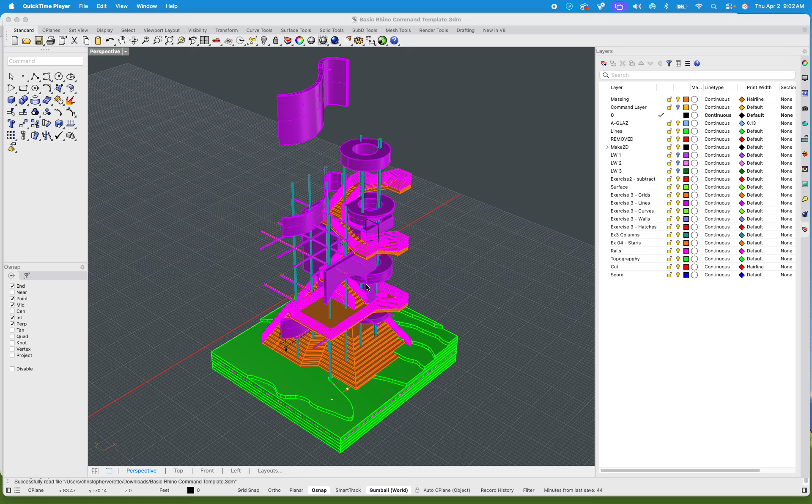But just a continuation from last time, we talked about in exercise 5 part 2 that essentially we're making a digital puzzle in many cases, basically separating each of these parts.

So I wanted to start going over one of the greatest tools that Rhino has, which is the ability to unroll surfaces. But I also wanted to go over some key concepts, because it's pretty obvious that some of these columns, beams, and structural elements are obviously not going to be laser cut. Those would be purchased at scale. You would find dowels that are 1/8, that are 1/16. Of course, 1/16 by 1/16 would be a 6 by 6 inch column at 1/8 scale. Hopefully that's making sense - relatively speaking, some things you can't just purchase.

You can't just purchase this wonderful cylindrical piece with a hole in it, so of course we're going to have to make those things. However, at the same time, we also want to start getting rid of things that we know we aren't going to make. After all, we do have a copy, so we could potentially use that for rendering or creating perspectives eventually.

So this is essentially my puzzle piece model, with its own copy, if you will. However, I mentioned last time, before we start laser cutting the topography, you might want to make accommodations for what you have going on in your piece. For instance, I have a bunch of these extrusions, and I may want to lift that up a bit more and get that just right, letting some of the stairs blend in and letting some of them go down.

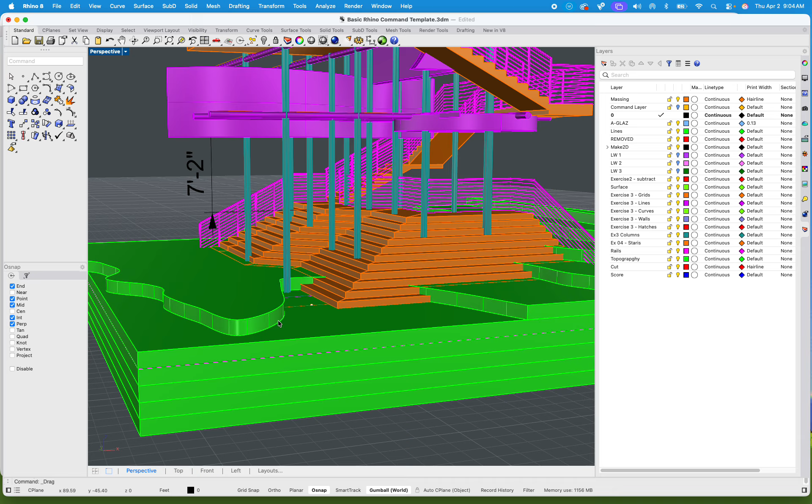After all, essentially at 1/8 scale, a 1/8 piece equals a foot. Most cardboard comes at 1/8 inch, and that already has a scale attuned to it. So in our case, we do have to do a little bit of extra critical thought. I've brought in at least 3 of the arguably better models.

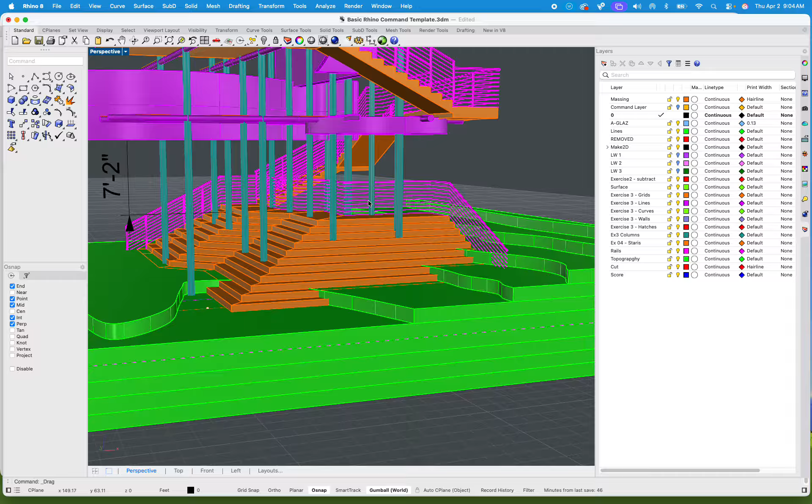Some of them have stairs - I want you to look at the quality and the way that they actually made these stairs, because you don't necessarily have to make it exactly like the digital model. We can prepare for that in the digital model as well.

So a couple of things. First things first, I think I'll turn off my rails, or essentially get rid of them. I do have a copy of them, so I don't necessarily need them.

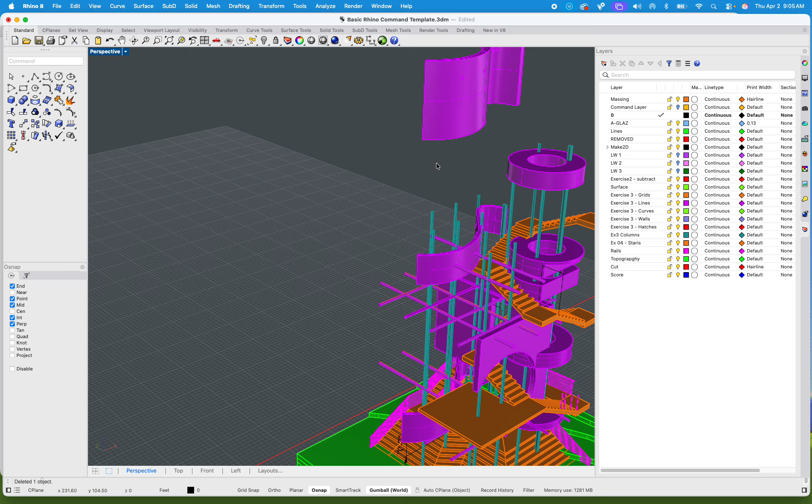So again, I still have some refinement to do. As you guys noticed from last time, we were still starting to take these pieces apart, refine them, cut them, blend them together, and for some of us, maybe even exploding them. For instance, my stair is all one piece - I may actually want to explode that, break it down, and start to understand it bit by bit.

However, one of the most important things I'd like to go over today is definitely the topography and getting that really ready. To make it easier on myself, I'd probably want to cut out my topography, glue that together, but then actually start placing my vertical columns in.

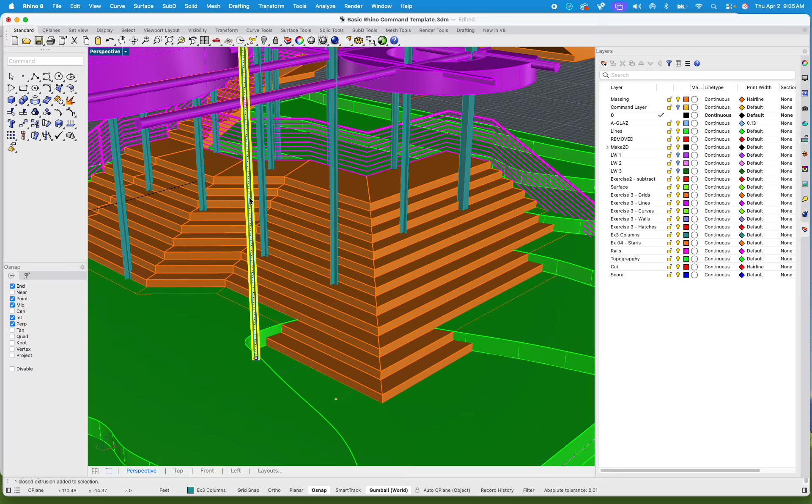Now those would be purchased, right? Those would be actually bought from the store, and relatively simply I could just cut them myself. Obviously some of these dowels come in 2 or even 3 feet - arguably even on Amazon they come in like 4 feet. But we don't have to work so hard.

In fact, I can make a copy of essentially all of them, or start to turn off some of these elements that are getting in the way. So in my case, turn off some of the exercise 3 that I don't need. Arguably maybe even the grids. Maybe I do want to keep some of my other work.

Oh, looks like this is where my organization doesn't pay off, because I do want these beam elements as well. I mean, why work harder when I can work smarter?

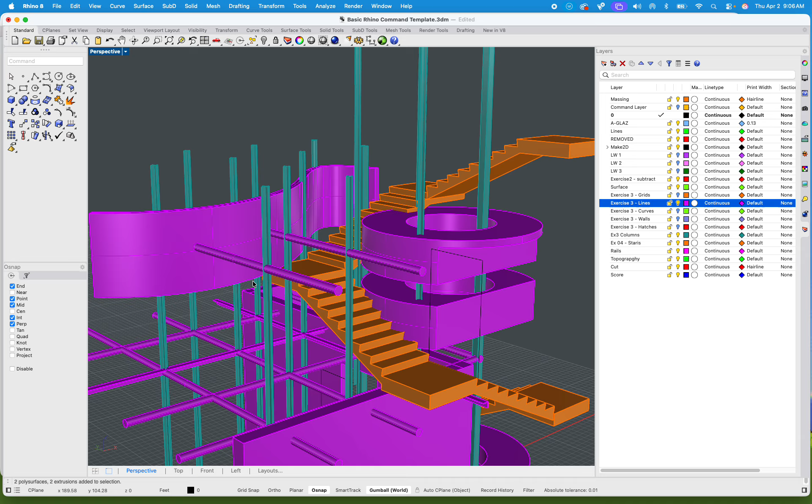In my case, I might want to separate that first, but at least for the sake of the tutorial, let's keep going. Let's get rid of the stairs, and we really just need some of these pieces. Some of this I know I don't need, like the handrails and everything like that, so I'll continue to delete that as well.

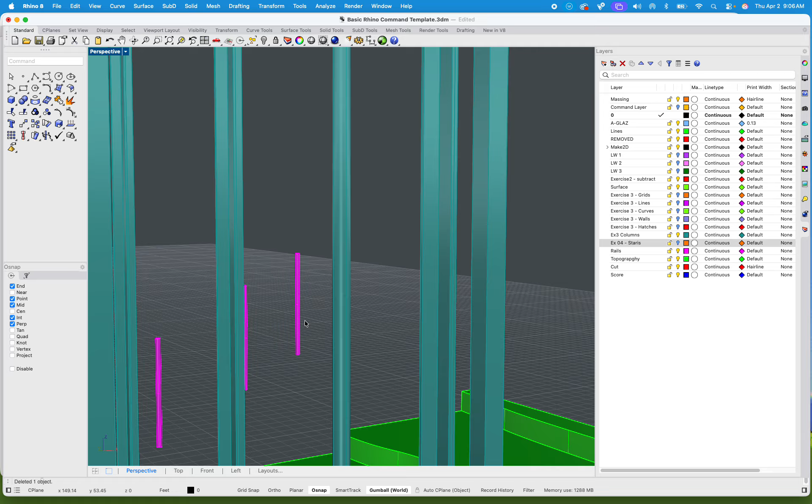I will say exercise 5 just takes a long time, mostly because there's a lot of planning involved. But that planning that goes along in the digital realm ends up saving us a lot of money in the physical realm, I could argue, because a lot of that planning is kind of done on the spot.

Especially in architecture school. But relatively speaking, the first thing I want to do before I start to trim them is Boolean difference these out of here. So essentially I'll take the entire piece, Boolean split or difference, and start to get rid of some of these pieces. I'll get rid of that one, as well as all of these at once. I'll hit enter, and of course you should start to see little holes.

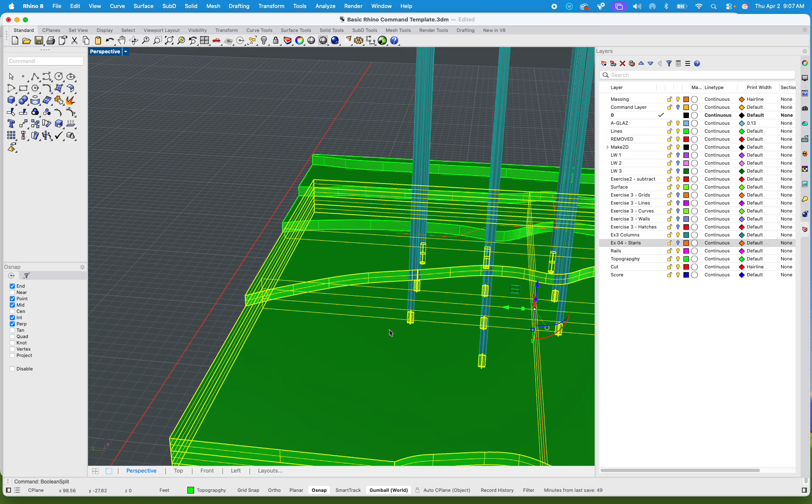Obviously we want to laser cut those holes. Nobody wants to sit there on each piece and be like, am I getting this right? No. In fact, we'll have the pattern that we've created, whether it be arbitrary or pretty congruent, actually etched into the piece. Does that make sense, guys?

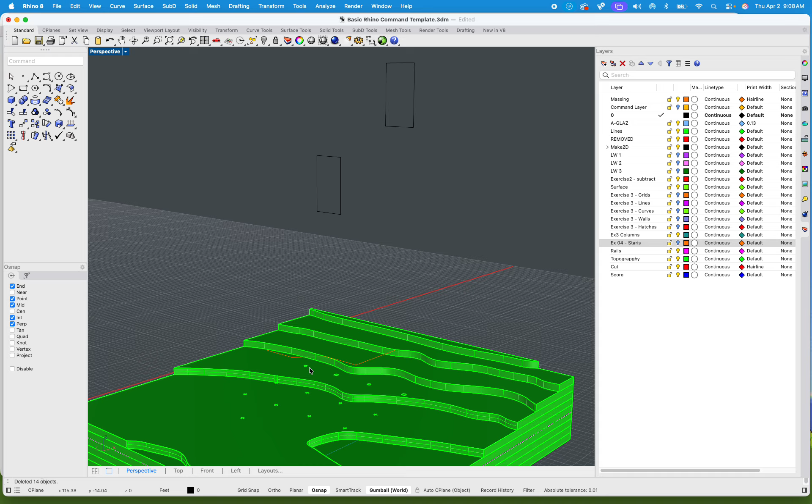Split it out, right? Once we do that, I won't necessarily get rid of it, but I'll take these pieces, copy, and basically move them out. I guess I could have just moved them too, but in my case, still refining, still getting rid of things that I know I don't need or that are just kind of getting in the way.

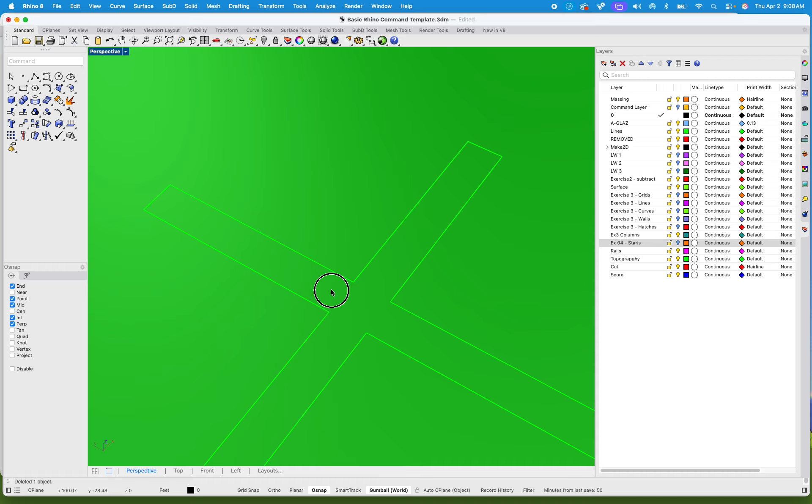Obviously pieces that I use to make the piece, but don't necessarily need anymore, such as these curves, all kinds of things get in the way. But relatively speaking, you should almost even see the piece still there, so we might have to get rid of it. And arguably it's kind of hard to see when it's all green, so you might choose something like a ghosted view. Not much better, but you can definitely tell there's some spacing in between.

Now what's kind of nice is now when I take these pieces out, such as this one, and make it 2D, now it's essentially ready to go. I mean, that saves me hours of time just right there.

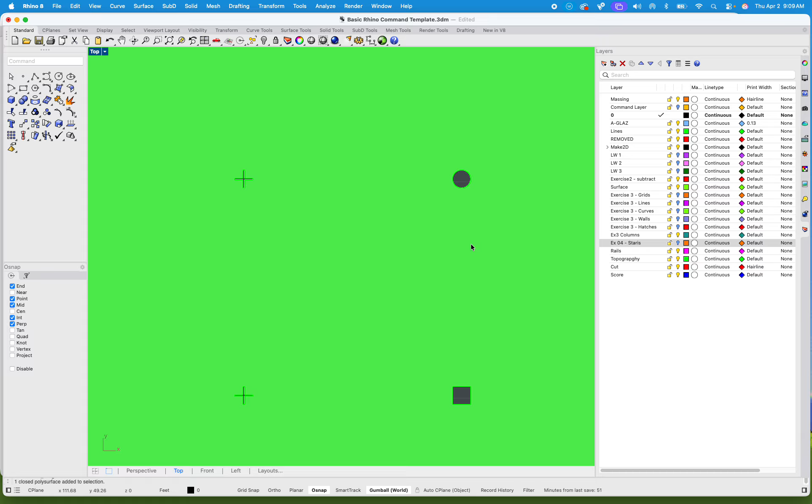Now don't get me wrong, that's a pretty small cut, and the laser cutter will cut that, but it won't save the little piece that it does cut out, because it's just so small, and it's gonna get sucked through the machine. However, in this case, we don't really need them. I mean, they're so small, they're gonna get sucked into the trash anyway. And, well, that's kind of an experiment in itself.

See the limitations, if you will. How small can you make a piece? Or even control the laser cutter to just etch it to where you can kind of push it out is also another alternative, but that definitely takes some skill and arguably a lot of tries, if you ask me.

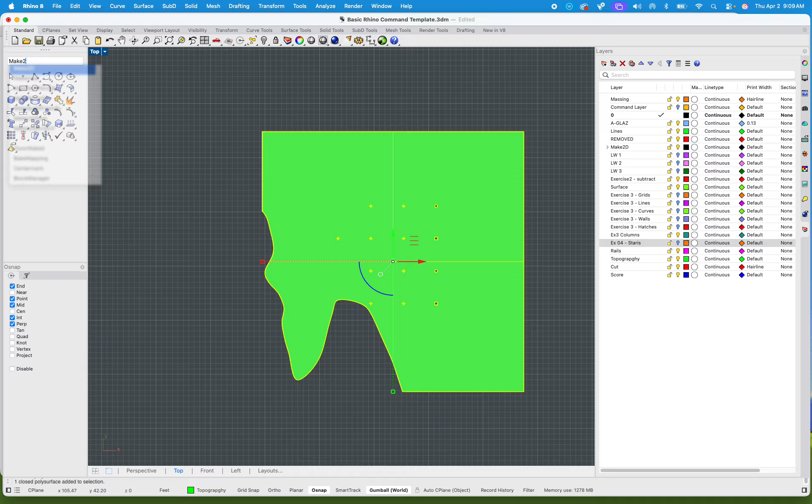But from here, I can make it 2D and essentially now get that piece and send it to the laser cutter. I don't know about you, but as a student before a laser cutter, I would sit there with these pieces. Another thing that I could do is essentially print this out on a regular piece of paper, put it on the piece of cardboard, and use it as a template. Again, that's a time saver right there.

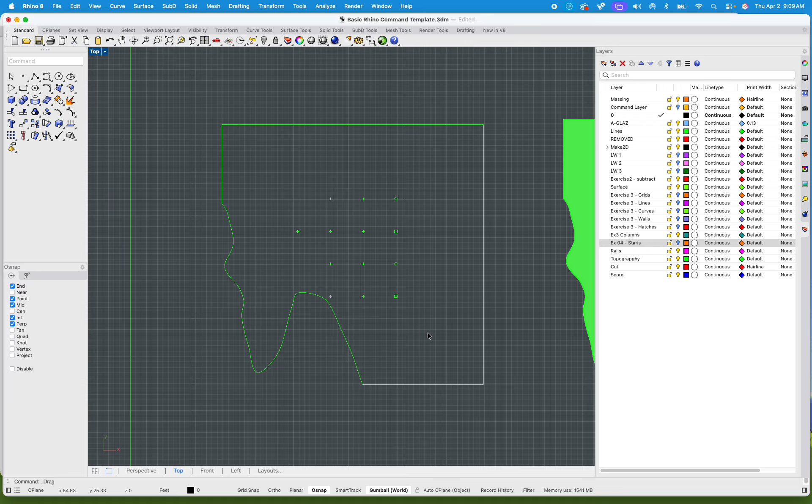I mean, and don't get me wrong, for some of these pieces, you'll realize a laser cutter is maybe the best way. Perhaps doing it by hand is the best way for other parts. And you'll see what I mean, especially today when we get to some curvilinear elements as well. However, to be said, you can use a laser cutter.

You can cut multiple pieces and stitch them together in reality, right? After all, we do have glue, we have tacky glue, and they say duct tape holds the universe together. But in our case, I would want to get that piece by piece.

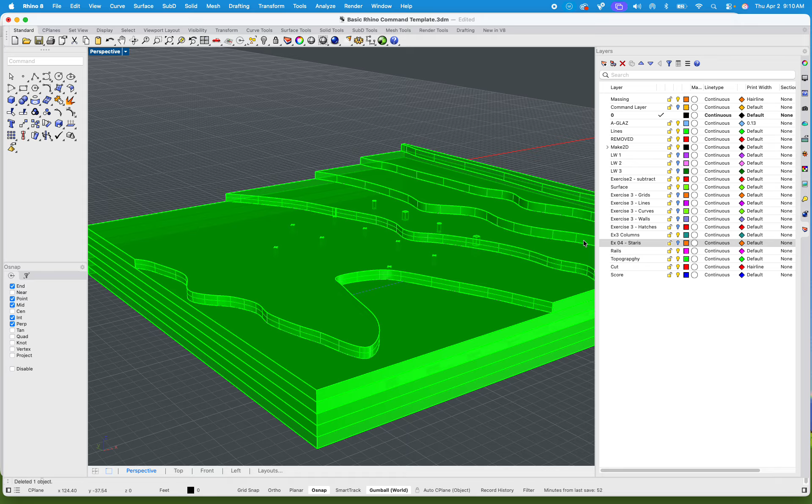So before I start laser cutting my topography, make sure that you remove some of the pieces that you know you don't need. In my case, I still have a couple of things. Even though I got the vertical columns out of there, I may have some stairs that I also want to incorporate. So let's turn on those stairs again.

To be completely honest with you, this is a really hard piece to make. For instance, if we unroll it, let's make a copy of it and take a look at the unrolling sequence. I don't know if I've shown this yet, but essentially we can unroll surfaces.

As long as they're closed objects, keep in mind this does not work with an open object. If you're missing one face on that piece and you unroll surface, it's just going to explode on you. Nothing will be connected, and relatively speaking, you might as well make it by hand.

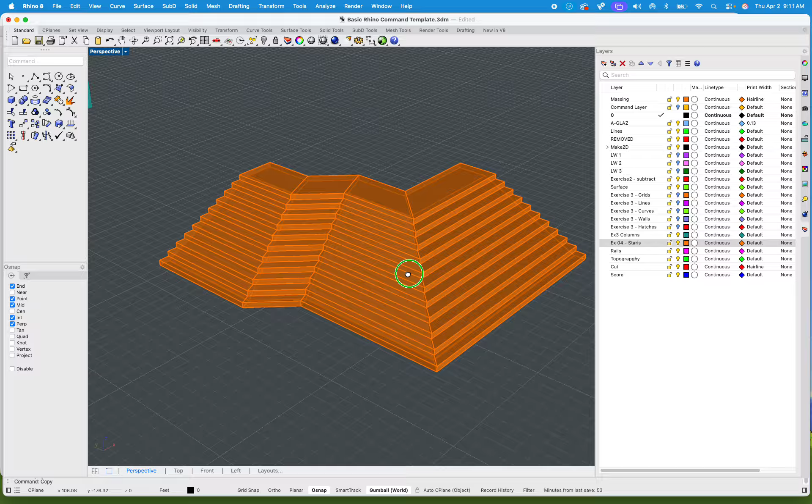To be fair, I know that this piece is going to require almost the same treatment as the topography. It basically even looks like topography if you look at it closely - a very well-structured topography, but topography nonetheless. In my case, let's orient that a little bit better.

Now, some of it, though, could potentially be laser cut, but let's check it out. Let's unroll surface, enter. In my case, I'm going to not choose explode, otherwise there are hundreds of pieces in there. So I'm going to not explode it.

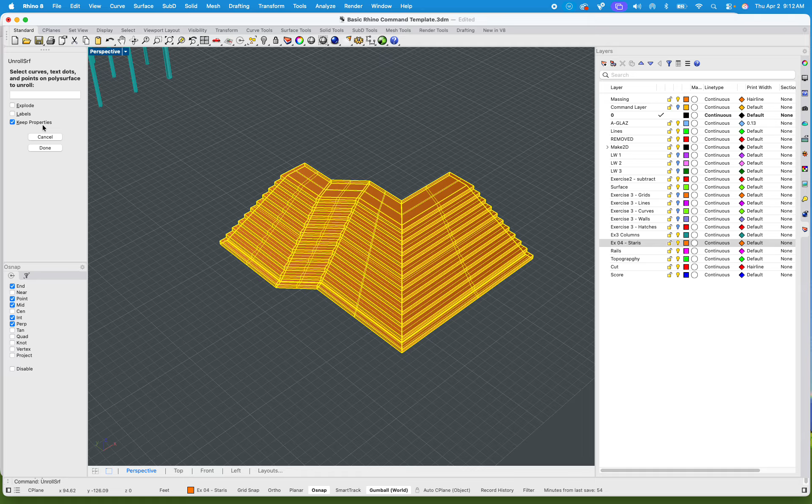I don't necessarily need labels unless I'm working a very complex piece. And keeping properties, try that out because sometimes it'll keep things stitched together versus it knows when it's not going to be, when it's going to fold in on itself and not be laser cut. So let's keep those settings, hit enter, and see what happens.

Not bad, right? I mean, don't get me wrong, it's pretty wild. And arguably might not even fit on a sheet for a laser cutter. There's that. But also, some of these pieces actually fold in on itself.

And if I laser cut that, I'm actually going to end up with a third triangular piece. So that's not going to work either. So I may have to go with an exploded view, or explode this one, and actually laser cut it piece by piece.

In fact, some of these pieces, well, that might actually work, right? And you can kind of see it, can't you? If I were to laser cut this piece out and essentially fold it back together, almost like an accordion shape.

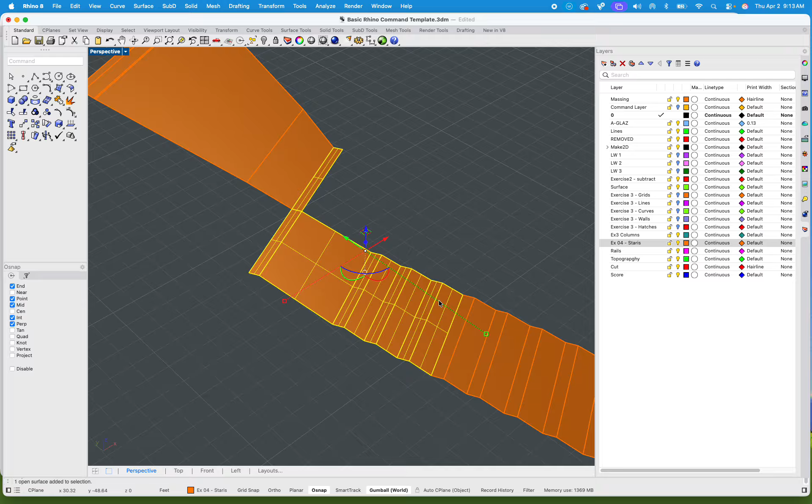Now, arguably, that's a lot of work. That's a lot of separate pieces, and just like a car mechanic, the more pieces or parts that you have, the more chances, literally, of failure of those parts, which is probably actually a design choice for most cars because that's money for the mechanic and money in parts.

I would purposely even design a car to be unfixable. Why? That way, once it breaks down, I make more money and you have to purchase a new car.

Now, in architecture school, we don't want to make models over and over again. After all, we're at community college, and let's face it, we don't have all the money in the world to just be making and pumping out models. We got things to do.

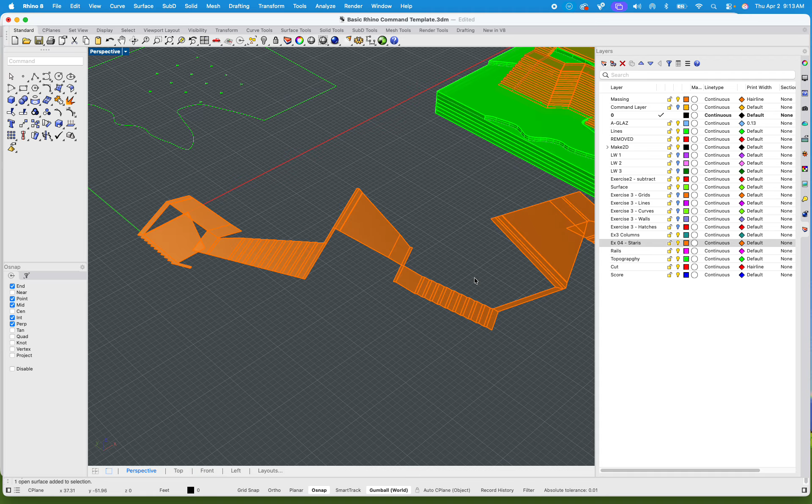So this might not be the best way to tackle this part. So let's try another thing. For instance, I could take a look at this part strongly and see a series of pieces that I can manipulate and/or even draw on.

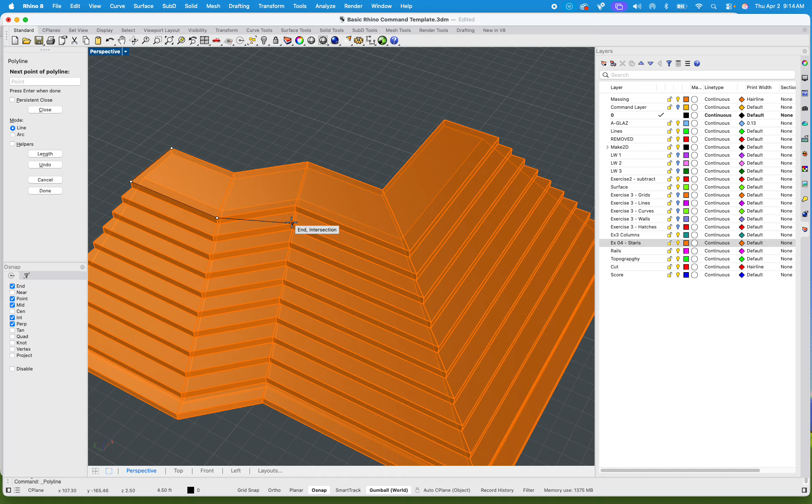So I could take my polyline tool and simply just trace these pieces out. Now, there's not entirely a perfect way to just automatically trace all this, and I probably wouldn't trace anything in a ghosted mode, because it will easily pick up the underbelly. But I could do it just like the topography.

Now, arguably, this does take a little bit extra work, but if you've actually kept track of all your pieces, it might not be so bad.

But that's a lot easier to cut out of cardboard than folding all these pieces in a magical way. Don't get me wrong, you can get any model, like a car, and unroll that surface. That might be the best way because you have a lot of curvilinear surfaces on a car.

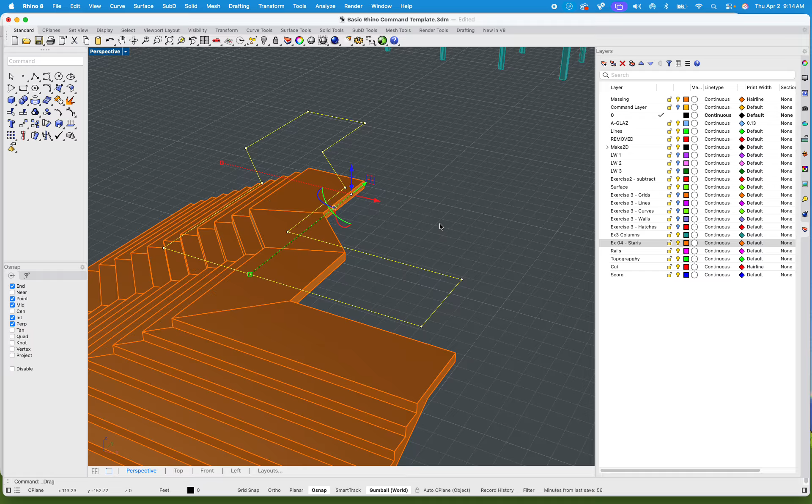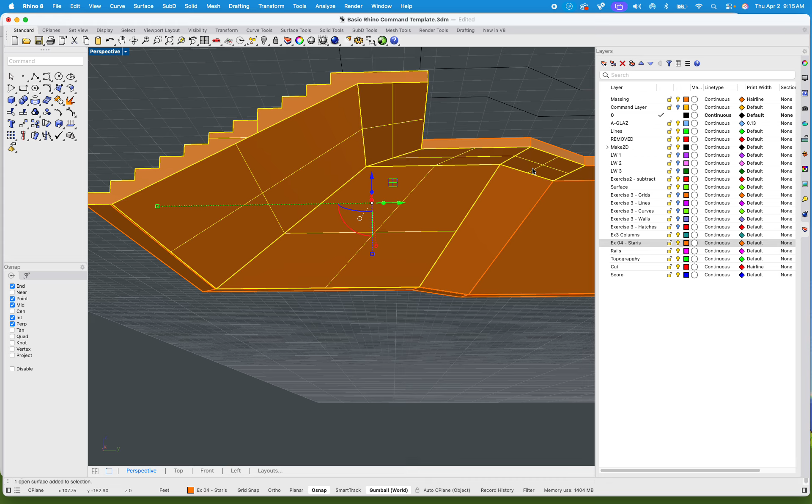However, in this case, you might have to think outside the box a little bit and use other techniques to fashion something more realistic. You may have wondered, if I do that, I'm going to get stairs on the underbelly. So I could explode this and get the pieces I want, this one, that one, that underbelly, if you will - kind of all the outer parts.

And I could potentially fold those and put them back together. So even though these are all exploded and I selected these, I'm going to go ahead and join them again - J-O-I-N, join. And we'll notice that's one piece.

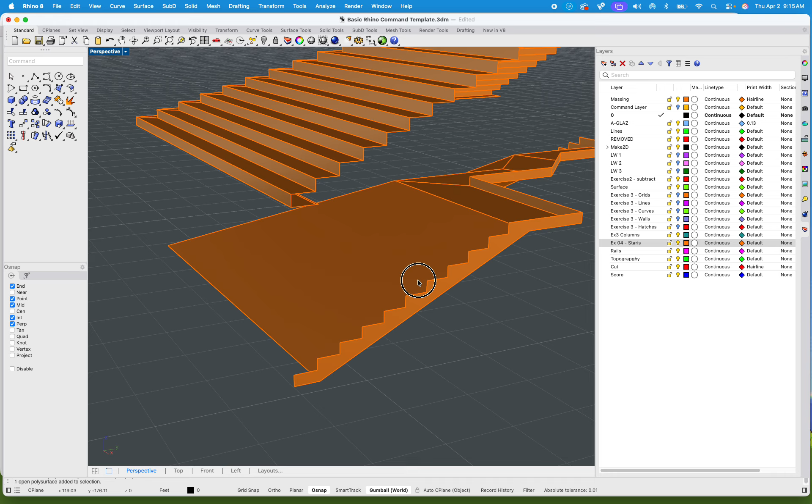Now let's try the unroll surface. Awesome, enter. Arguably that is much more doable. You see the difference though, right? It recalculated that folding for us, but it was based on a very specific object that we gave it, so keep that in mind.

I would say what makes exercise 5 so difficult is we have to critically think about every single bit and piece, and that's just true of architecture. For some of you in studio, you know this well, or are starting to develop this well - it takes a lot of thought, a lot of critical thinking, especially when it comes to building a model.

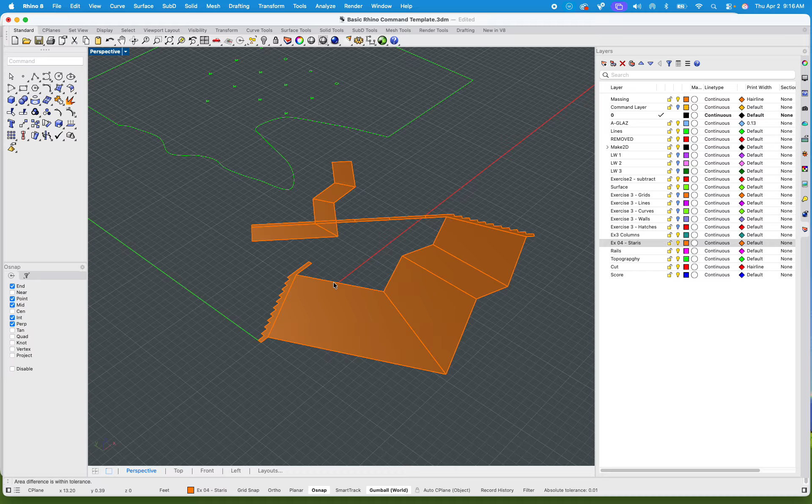Some things work in a digital realm that just don't work in a physical realm, to say the least. However, this is something I could potentially laser cut, and as you can see, I'm still getting a fold in on myself. So I may want to explode this, and even from here I'm not exactly finished, guys.

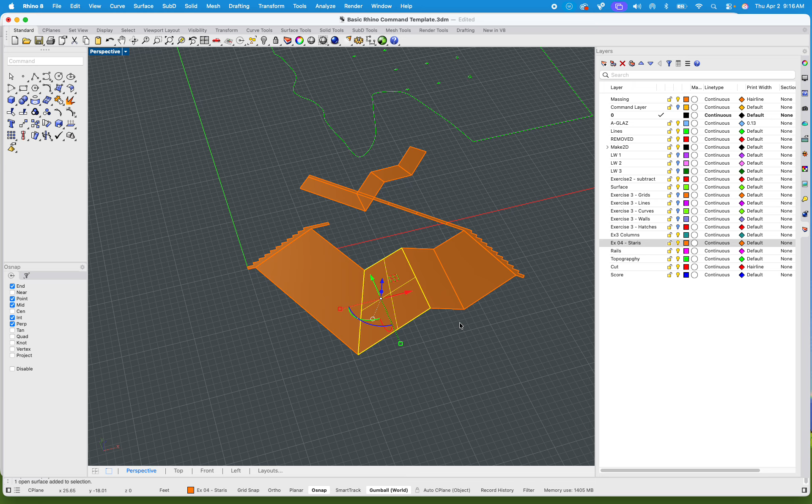I would want to also make 2D, that way I can get those shapes. So let's say that's looking pretty good. I'm going to go ahead and make 2D from a top view. Make 2D, top view, apply. And potentially that would be the one that I actually start to laser cut. Does that make sense, guys?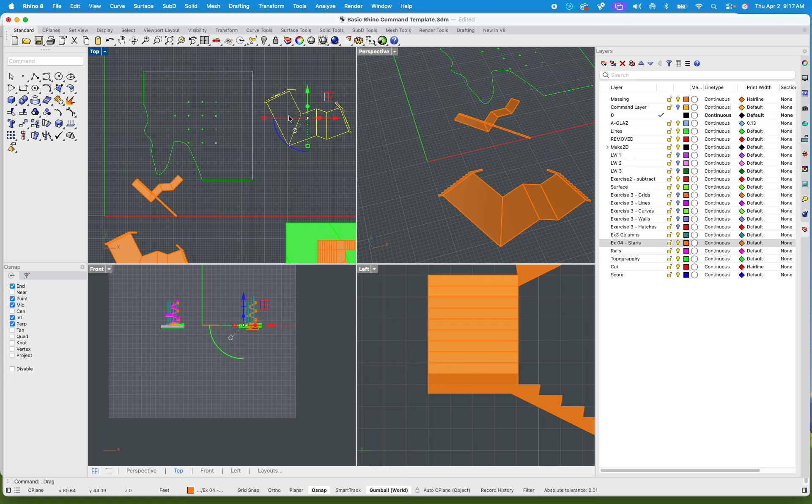Hopefully so, because I would say this is where students arguably have the most struggle, since it takes a lot of three-dimensional oriented thinking. However, once that piece is done, I move on, right? Arguably I don't need to keep these pieces, but I forgot this one, so I can't leave that one behind. Also I see there's overlapping pieces, so I'm going to move that out of the way and rotate it.

Again, this is where being organized definitely comes in handy. So not only do I need to make the topography pieces, but I'd also need to make the underbelly and fold that around. Potentially, I could even double material it now - this could be concrete or chipboard, whereas maybe those topography layers I made, this piece, maybe those are basswood and very thin in order to actually make a really nice model.

Not gonna lie to you, you could use this technique to make some very badass models, excuse my French. But realistically speaking, just like we do in graphics when we print something and try to make it look analog, the same thing could be applied to a laser cutter, guys. We don't want to make it look like it was made on a laser cutter. Sure, we want to use it for its accuracy, but we don't necessarily want the burn marks.

Now luckily on chipboard, there's not a lot of burn marks. Luckily on cardboard, there's not a lot of burn marks. However, if you use museum board or basswood, it's definitely got a burn mark. We can't sandpaper museum board, it'll just fall apart. Same with chipboard. But we can sand basswood. Let me tell you, that's the game's secret - laser cutting in basswood but leaving yourself a little bit of an offset so you can actually sand it off and make it look like it was hand done. Can't tell you enough.

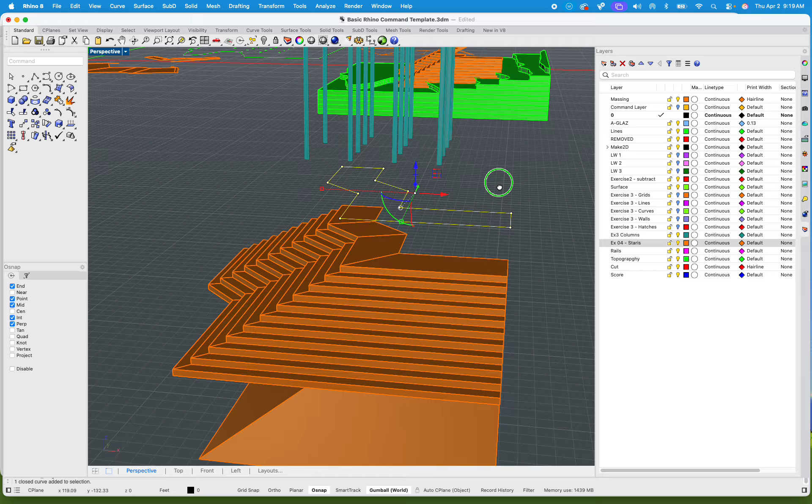However, we've just talked about the stairs. Let's also talk about removing it from the topography, because that may be something we want to integrate. It may actually be easier to leave the stairs intact, or I can take that away from the topography easier than I can take it away from the stairs. Does that make sense?

Question: Are the burn marks on the laser cutter always going to happen, or does that happen after a certain amount of time in use? Always. It's just the name of the game with the material.

Now there are some ways to mitigate it, such as putting blue painter's tape on both sides of your museum board or chipboard. That will really start to eliminate some of the fuzz you can't get away with. However, if you've got really tiny parts, you're sitting there taking off a lot of tape, which arguably takes even more time than just doing it by hand. It depends on the situation and how much time you have. It's a really great question.

How can I mitigate some of those things on the laser cutter? To be fair, test some things out. There's nothing wrong with getting a sample piece of material and trying different things on it. Obviously don't choose flammable items to stick on there, but you'd be surprised. I'd say painter's tape is probably often the best because it doesn't adhere to the material so badly, whereas duct tape is going to destroy that piece, right? Unless it's acrylic or something, and you can cut acrylic on this laser cutter as well.

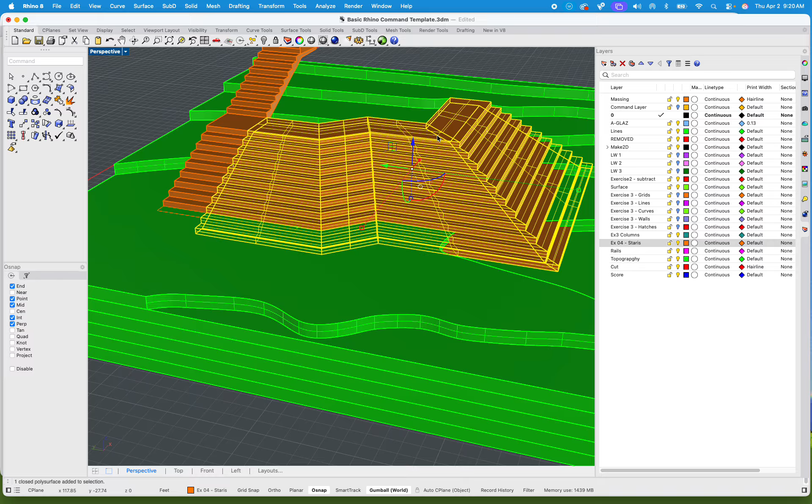However, that's probably not needed for this project, as we don't really have much windows or water for that matter. But back to my point, it might actually be easier to remove this stair from the topography. So let's go ahead and do that first.

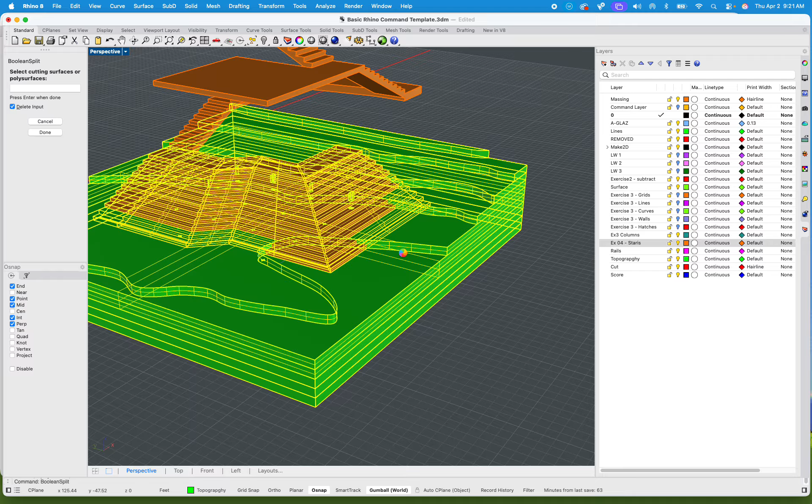In my case, I'm going to do a Boolean split again and actually use this piece, just because I know those pieces touch the ground, as well as all of these. Enter, and let's see what it does. Nice, it actually worked. So I'll take all these pieces and see what happened.

Naturally we have some of those things. It kind of added one here, that's kind of funny, so it's not working on this guy apparently. Let's get rid of that. Oh, there's the piece that it was supposed to take out. I don't know why it added it in. That's kind of funny, not haha funny, but different. Let's try that again, maybe in a simpler way.

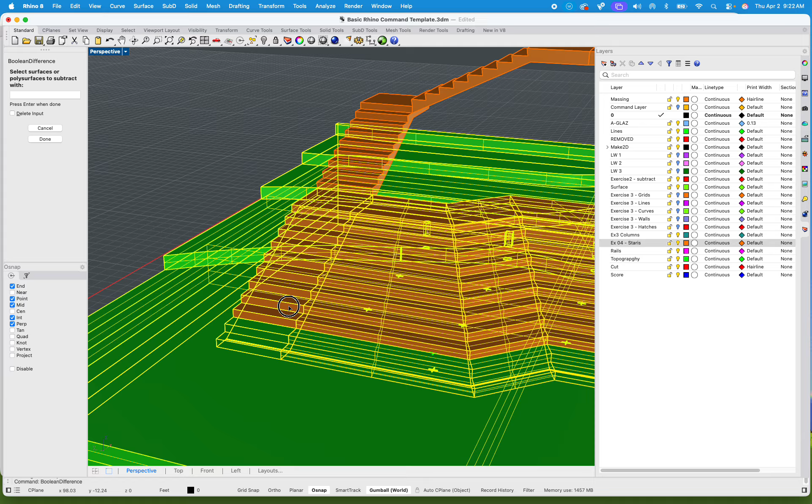We'll use our Boolean difference instead. We'll use this as an object, enter, and we'll use this as our subtractor and see if that works out better for us. So again, Boolean split, Boolean difference, you'd be surprised, and Boolean difference failed, and it gives us where it failed. So not everything's going to work, not everything's going to succeed, and that's okay.

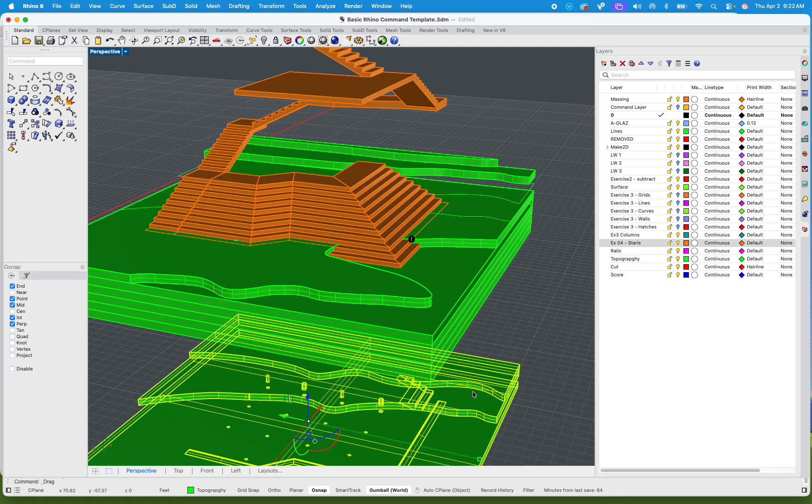Let's try that Boolean split again, but maybe one piece at a time. Sweet, that seems to work out a little bit better. But as you can see, we'd want to laser cut that out, right? I mean, who wants to sit there and measure that all day? Oh, got rid of it a little too much. But yeah, we'd want to remove some of those pieces.

And then of course, even make that 2D. So even if you don't get the perfect three-dimensional piece, that's okay, because we just need it to transfer into a two-dimensional realm. So I'll take that one, make 2D. Let's get it over here maybe. And I can still arguably refine that better in 2D than I can in 3D. And there you have it. Even though it wasn't actually a hole there, I can cut it as one, and of course I accidentally have two lines there, so I'll explode and refine it.

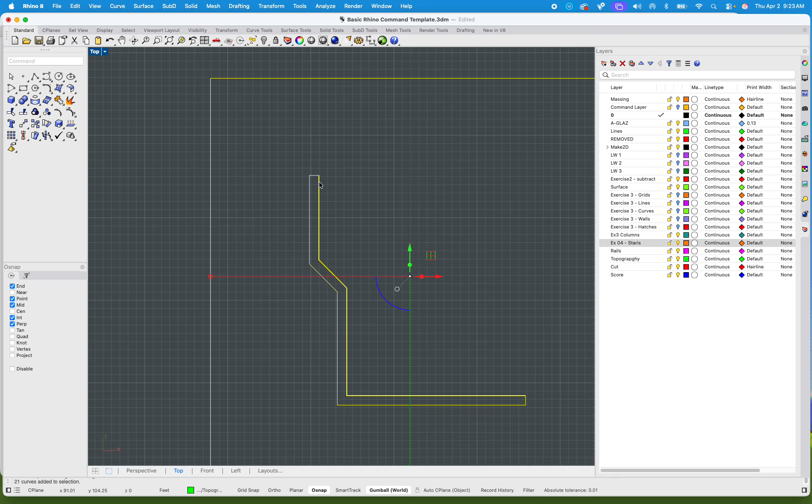So again, I really just wanted to get into the nitty-gritty of some of these elements that, gosh, I wish somebody taught me along the way. But really just trying to share the secrets with you. Stuff that I've learned along the way and have been taught that usually you don't find in a YouTube video, because well, that's job security. However, that's what you guys pay me for, is obviously the job realm. So I'm going to share some of the trade secrets with you. And arguably, I just saved myself 30 minutes time. Instead of trying to model it perfect, I get it perfect where it needs to be perfect. Does that make sense? Anyway, I know I'm kind of talking a lot today.

So, and using my hands a lot too. Arguably won't get on the recording.

So, again, piece by piece, brick by brick, as they say in architecture, right? But again, starting with the foundation, you'll see that I definitely start off with the topography first, right? Getting each and every one of those pieces cut out, and arguably removing things that I don't need. And that's a funny little piece, right? Arguably, there's no way that the laser cutter can do that. It can't cut at that angle, right? So which one would I take, guys? The top piece or the bottom piece?

Hard to say. It's kind of a trick question. It depends, right? Well, if I take the bottom, make it 2D, well, it's going to require that there's going to be a hole at the top, right? If I take the top piece, well, arguably they're not going to see the bottom. So I take the top piece, right? Because then I could slide that in, and arguably once I cut it, I could get the X-Acto blade and actually make that angle if I wanted to. To be fair, you probably don't need to for this project.

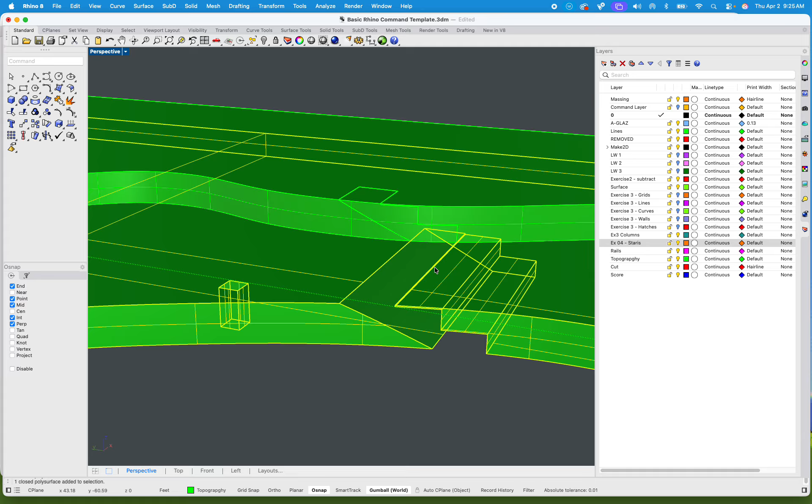And some of those techniques, of course, were already practiced by other students. So it makes a lot of sense to look at where we're going with this. And again, some of the techniques that may actually look familiar on your project. However, that is definitely the nitty-gritty. Not everybody's going to run into this exact situation. However, some of you have gotten fancy with the stairs, and I appreciate that, but it definitely does make an interesting and harder to build model. But my goodness, the reward I think outweighs the work, because that is beautiful. You know, the way the stairs can go from one topography to the other topography, and really is a game changer in terms of what you can do in studio, right, to say the very least.

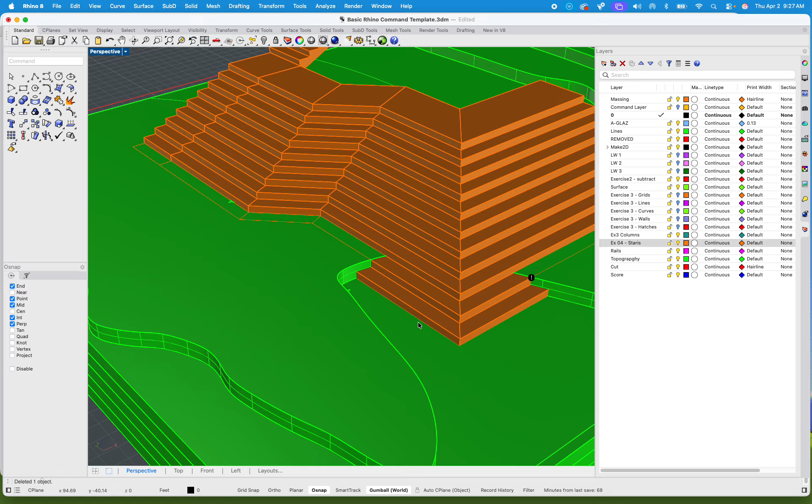Arguably, this is something that even professionals today are still working on, how we take the digital realm and make it in reality, except it's on a grander scale and you're getting paid hundreds of thousands of dollars a year to do so. So there is a difference. But we do want to practice it as a student, because you may very well be hired for this exact reason and your knowledge on this. If you want to pursue this, I would definitely encourage you to go to Texas Tech, where they have an amazing digital design and fabrication certificate, right? Which is where I, of course, learned a lot of this. However, I won't share it all with you because, well, there's just not enough time in the world, and I know we have other things to do.

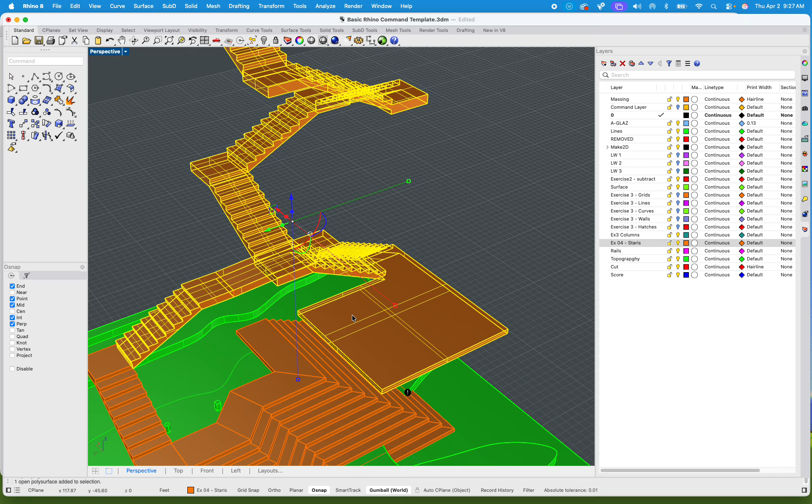So let's continue, and let's just get to these stairs, arguably one of the hardest parts. I would recommend that you do it bit by bit. So, for instance, right now, I have a large bit, and I can't just unroll this, because that would literally hurt me, right? It's just awful. However, one thing you may notice is, well, I do have certain planar elements, right? So like these observation decks, man, those seem pretty simple. I can make those out of chipboard and actually make the stairs separate and actually just glue that myself.

There's no need to try to magically do it all in one piece. Don't get me wrong, that sounds great on paper and maybe in the mind like, oh man, I'm gonna knock this out all in one piece. Easier said than done, right? One thing I would recommend is, honestly, when in doubt, break it down piece by piece.

You'll notice some of these students accomplished the stairs by laser cutting the stringers and then cutting out little pieces to glue onto those stringers, leaving it hollow. That's absolutely fine. Some of them really did go the whole way, and those stairs are pretty solid themselves. Some of us have floating stairs, maybe with 2 stringers in the middle, again using basswood steps.

Something arguably I could probably purchase at 1/8 scale is a foot, so 1/8 by 1/16 dowels. You can get those in packs of like 32 pieces at 1 foot, and that's enough for an entire model. I think it's about $3 or $4, especially at Hurwicks. Anyway, we'll talk about that once we get there.

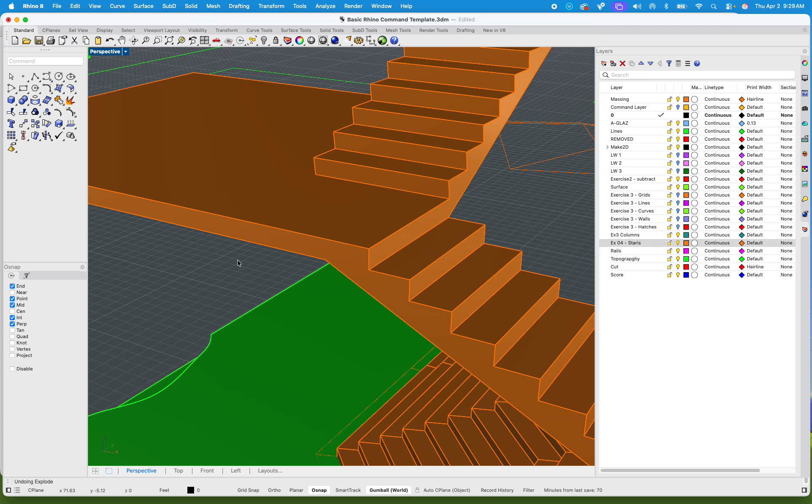For instance, breaking this down, I could explode this, but I don't recommend it because there's a lot of pieces. But let's go for it. Explode. And I can basically put these back together as necessary. This piece right here, maybe I do want to keep that as one solid piece. Maybe I don't, maybe I can't, maybe it's already together too badly. So again, just exploding something isn't always going to help.

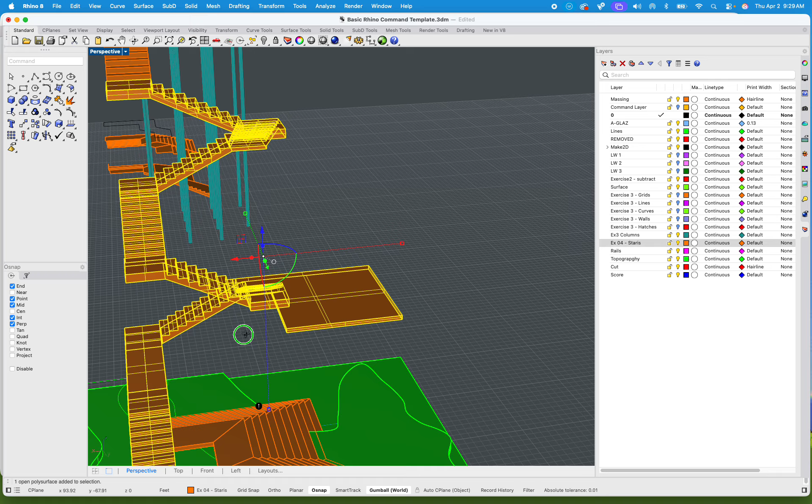In our case, knowing our model pretty well, and that is the critical thinking I'm talking about, we know that I actually copied my piece over and over again. So one thing I could do is actually make one and copy it over and over again. For instance, I know I have this one, number 2, 3, 4, 5, 6, 7, 8, 9, and 10 of them, so I'd make 10 of them. I don't really have to worry about this piece anymore except for that, and I really just need to make 10 of these. Is that making some sense?

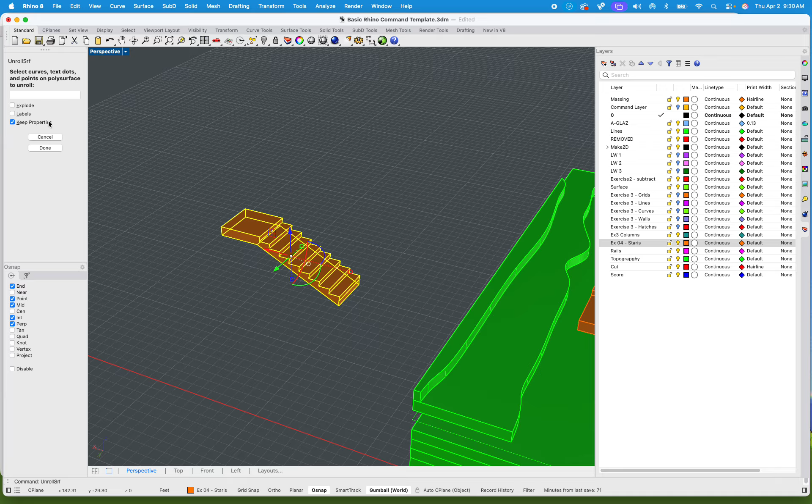Well, let's check that out. That might be actually easy to unroll. So let's make a copy and let's just try it out. Unroll surface. And let's not explode, and choose keep properties, and see how that turns out. Actually, not too shabby. I mean, well besides that overlapping here, not too bad.

But realistically speaking, if it is too bad, right? I mean, let's face it, the stair part, nobody wants to do that to every single accordion, and arguably it might not even look that good. Also, another thing to keep in mind is we can only score one side. We can't score the other side at the same time. We can't just flip it over and score the other side because aligning it is near impossible, right? There is a way on a CNC machine, but not exactly possible on a laser cutter.

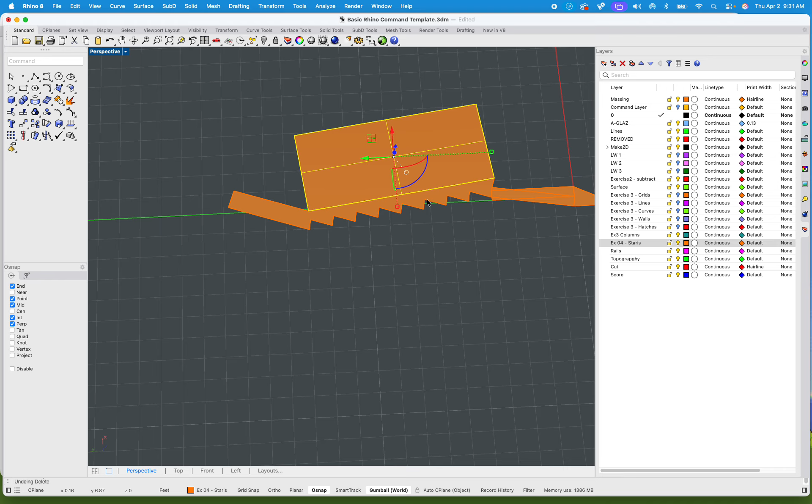So again, some of this stuff is just impractical. So leave it alone, but maybe save it to remind yourself, hey, I gotta make these with dowels, those kinds of things. So I'm gonna go ahead and explode mine and get rid of the elements that I know I can't make on a laser cutter. However, some of these elements I definitely can, like that last one, I could definitely fold that with my piece and fold it underneath. No big deal, right? However, some of this, well, that's not going to cut because it's going to cut 2 pieces out of each other and make very funky triangles. So again, I may either need to discard it completely, or use the parts as necessary.

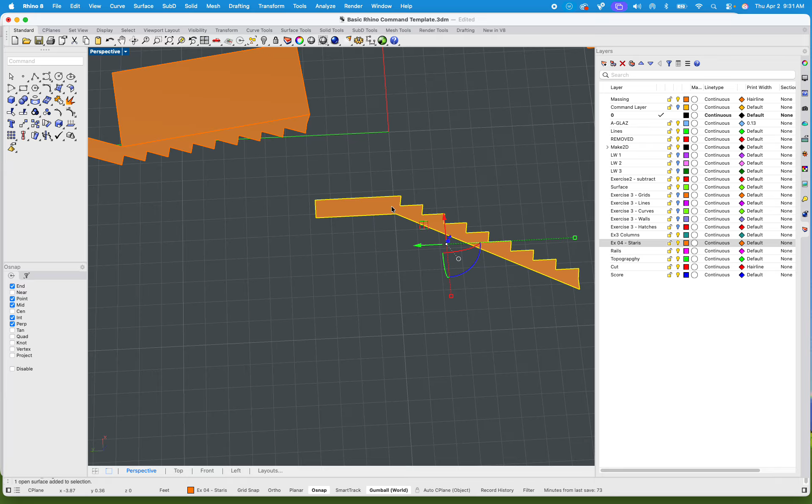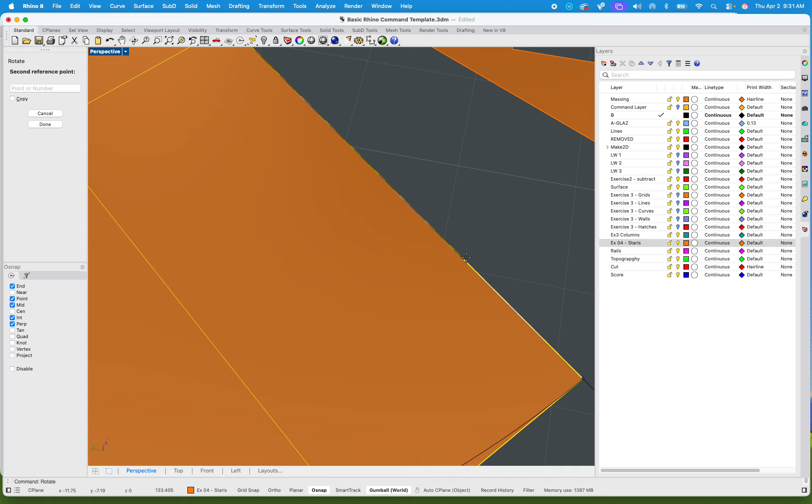So there's my stair piece. And if I know I have two, I don't necessarily have to take the exact same one, I know I have two. In my case, maybe I want that extra piece to actually be involved. So I'm gonna go ahead and move that one, put it accordingly, rotate, and do what they call in the business, manual creation. So there you go, there's my stair.

Now it's missing the top piece, which I could make in chipboard or basswood, but for the laser cutter, I just need to make 10 of those. Obviously I can't get that bottom piece—I think I deleted it—but I could put it at the top, especially if I knew how big everything's supposed to be. I could do a rectangle and actually make that piece. Does that make sense, guys?

So again, I could do this in 2 dimensions or 3 dimensions. You're not necessarily limited just because I don't have a model of it—I can't send it to the laser cutter. That's not true, because I can make 2D of essentially everything. In fact, we used to even etch perspective views into materials because we could, right? We could make 2D and then laser cut in 3 different line weights because we can choose 3 different powers, and make some badass drawings.

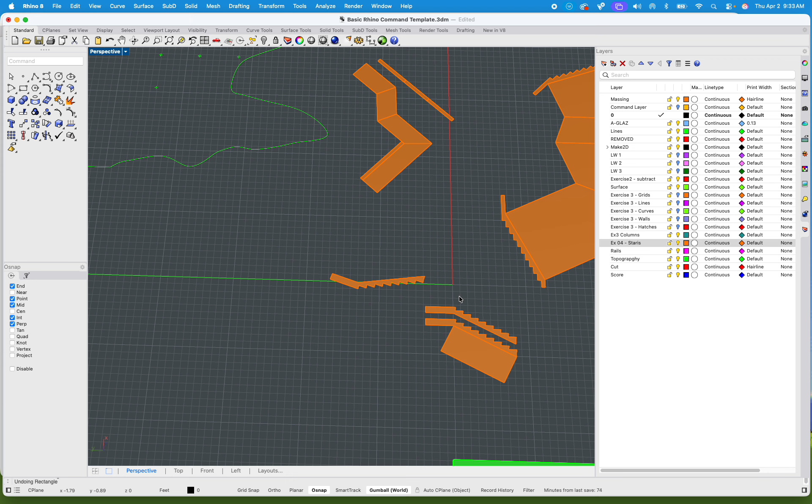Now, I usually do that in the summer because we're kind of limited to the laser cutter, but I still like to show that the laser cutter works. Again, there are so many options—just type in laser cut artwork on Pinterest and you'll get plenty of ideas. Either way, maybe not necessarily for model making, but definitely ideas for art.

Anyway, and graphic communication. But relatively speaking, I'm not finished here—I need to take that, top view it, and make it 2D.

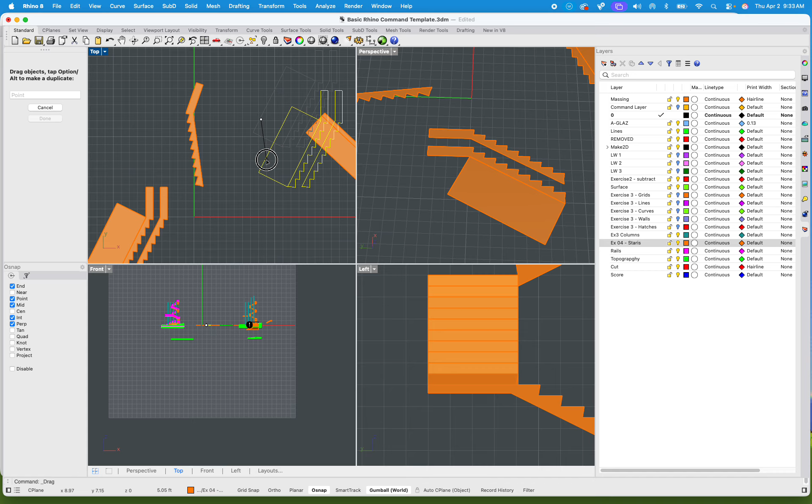And this is definitely where things start to get very unorganized, and you definitely want to start keeping track of everything. That is where I'd probably show all my other elements. I'd get that previous scaled piece, if you will.

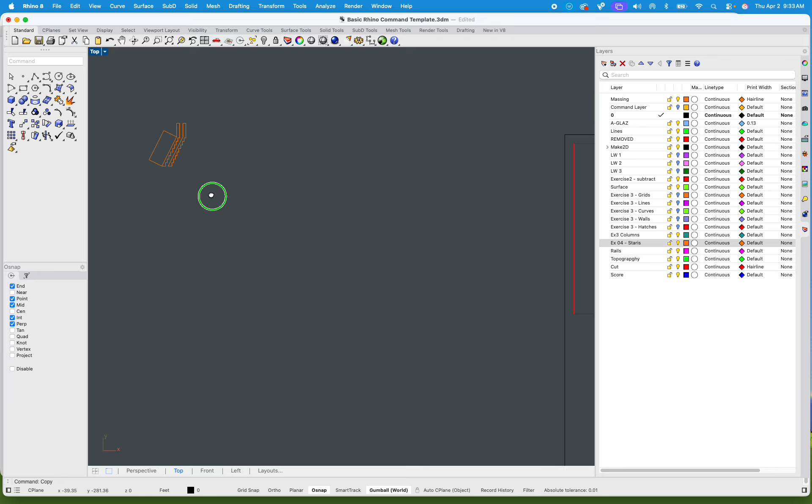So I'm going to make a copy of that one. And I like that rectangle border because it's already to a 1/8 scale. I can already immediately see how big some of these pieces really are, at least compared to the final board. Does that make sense, guys? I want to remember where all of this goes once it's printed.

Organized, right? So don't get me wrong, it doesn't have to be left to your memory. I have a pretty good memory, so I usually just do it by memory. However, you can always add text, and you could say, first stair. And then you could even be super specific—you could say without top pieces, or things like that.

And again, it might help you—I'd kind of put it on the outside. But always label these things. Also, half the time we do these things in architecture, we're usually in a group project. Let's face it, sometimes you're sick and you have to hand this off to a partner, and they're like, oh, I don't understand the mind of Wilson. So Robert may need some of that extra information to understand where Wilson's thinking was.

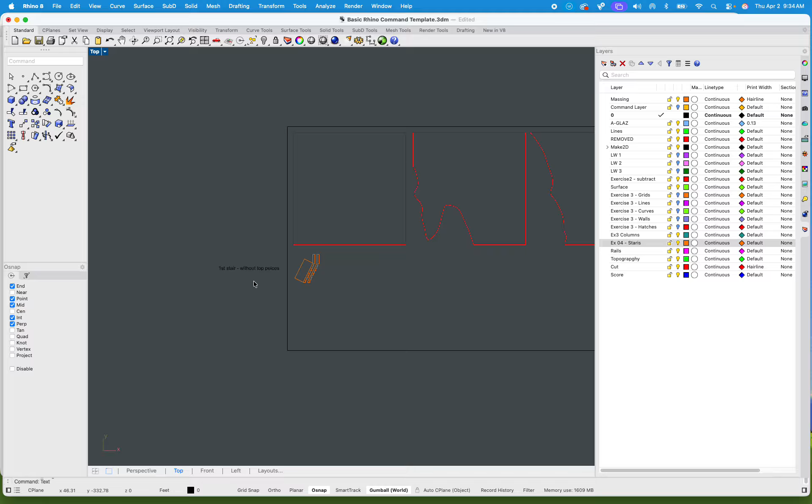Kayla brings up a really good question: how do I keep track of all this? That is exactly what I want to go over.

Obviously, I know I'm going to need multiple pieces, so I'd even make a copy of these multiple pieces. Especially at other schools, you don't even get to touch the laser cutter—another operator works your pieces for you. And honestly, if you don't have any notes on it—I used to be one of those operators—I'd be like, well, you don't have any notes on it, it doesn't say basswood or not. And then they'd come back and say, I want it on chipboard, and I'd be like, how am I supposed to know that, right?

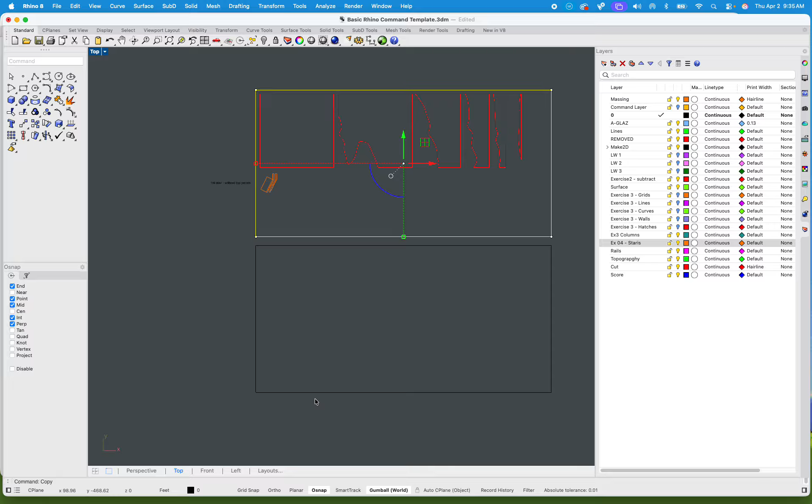Unless you label it somewhere, right? So we often see a digital file, or at least an operator will, when they send it to the laser cutter like a printer. So if you have something like this that says all cardboard, that might be a really good reminder not only for you, but also the worker.

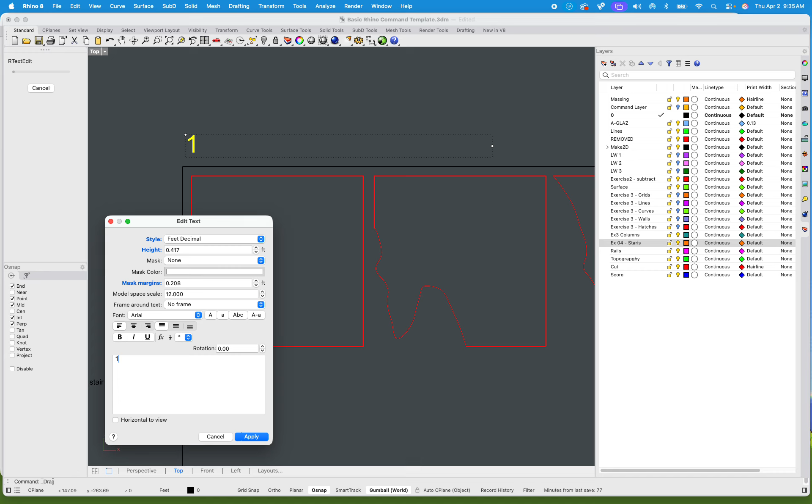So let's say I could be really specific: 1/8 inch cardboard. There is 1/16 cardboard, by the way—we don't really need it for this project, but it does exist. And that is definitely how I would start to be organized, right? Maybe this one's basswood.

Maybe I have a certain piece of basswood, and I know that it's actually 6 inches by 24 inches, so I can get a piece inside that piece if I know I have another basswood piece. Does that make sense? The world is our oyster here. However, it does make it confusing because there are so many things we can actually do.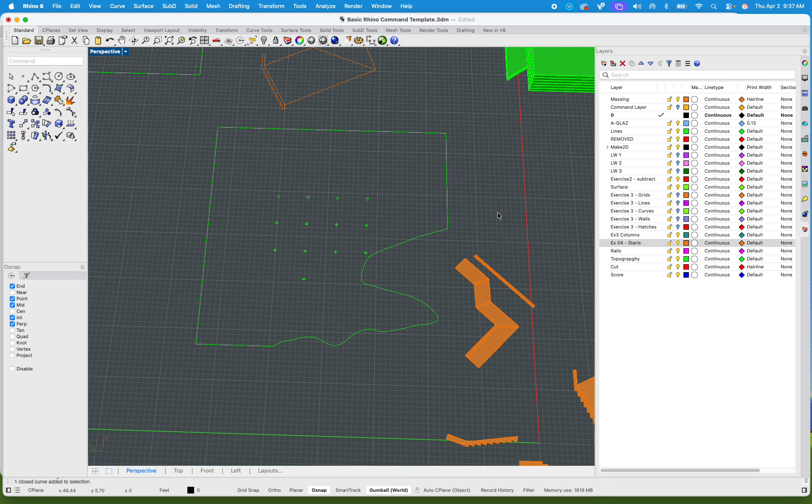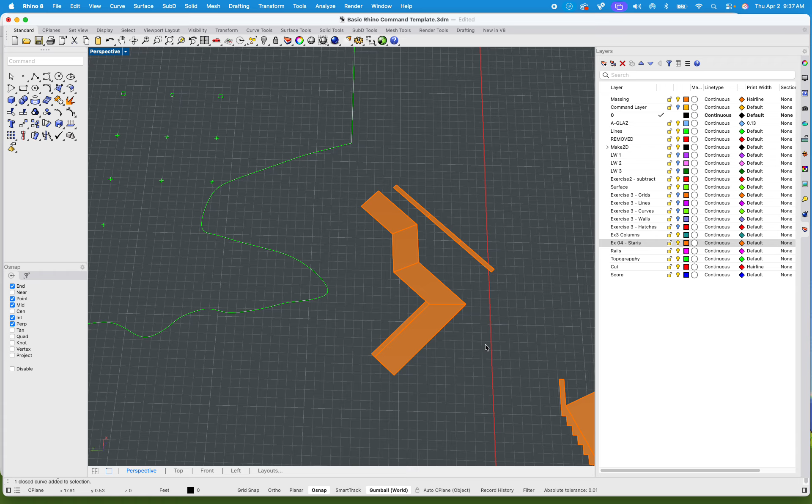Why? Kind of because of the Toy Story 1 and Toy Story 4 effect. Imperfection is perfection. Too much imperfection is imperfect - it's a paradox. But very often our hand-cut models look better because they look like they were made by hand, like talent was involved. They don't look like an AI piece of artwork, where some people's mentality goes 'that looks too much like AI' and they form a lower opinion of it. Same thing applies to a model - when it looks laser cut, it looks like you didn't do anything, like you just sent it to a machine. So how to eliminate that is up to you, whether sanding or doing particular pieces by hand.

Just to continue, as you can see, I am exploding this piece. Very often, especially to Kayla's point, I usually delete the pieces as I go, so I don't end up making the same pieces over and over again. So just to play along, guys, I'm going to start deleting these pieces, or hiding them, whichever is nice for you.

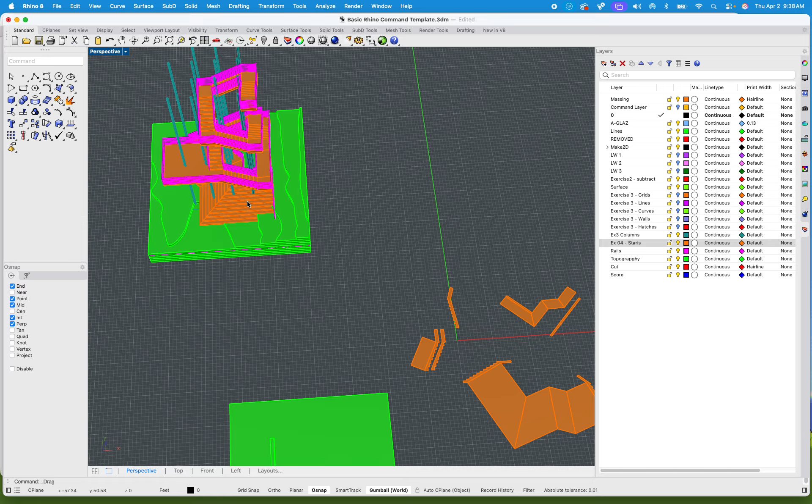Also, once I finish a piece, I put it on the board. That way I know that it's done, I know that it's topography, I already know that I have that piece. And I have a copy of my model, so I'm not worried about it being gone forever - I have a copy, I have copies of a copy. So I could potentially save time and not have to do this over and over again.

But once I have the piece, get rid of it, otherwise it just gets very cluttered. I already had that piece, so move it to my artboard, or my laser cut, or even just a print. The next thing I wanted to show is we can also work smarter for things we know we aren't going to laser cut.

For instance, the dowels won't be laser cut - they look bad, they get lots of burn marks, and they have burn marks on only two sides while it's clean on the other. It just looks weird. So just buy the basswood - trust me, it looks much better, and you can tell which students have a lot of burn marks and which ones don't. Some of them actually look like they were handmade even though they were completely laser cut.

Another thing we can do is, well, I know potentially I have a certain number of dowels - 1, 2, 3, 4 - and I would count them. But potentially I could take this one and make it 2D as well. Why would I do that? Well, if I print it out and I've got a bunch of, say, 2 foot long pieces, I could just line it up with the paper, cut, line it up with the paper, cut, line it up with the paper, cut. I don't have to sit there with a scale, I don't have to measure every single one. You guys see where I'm going with this?

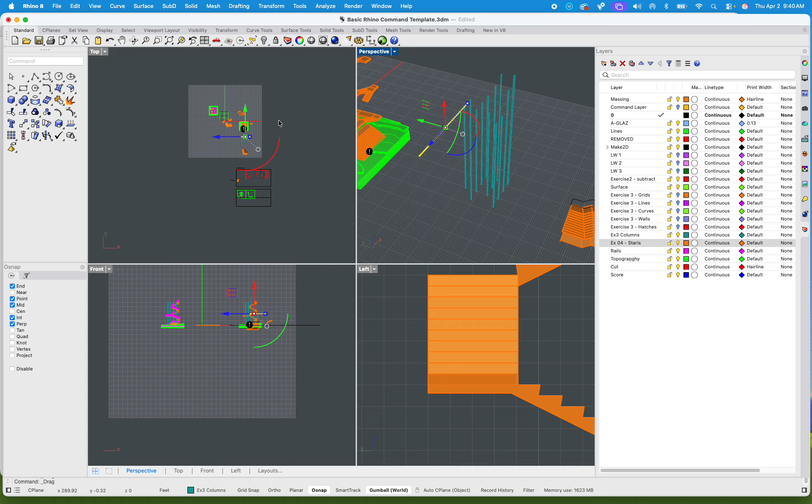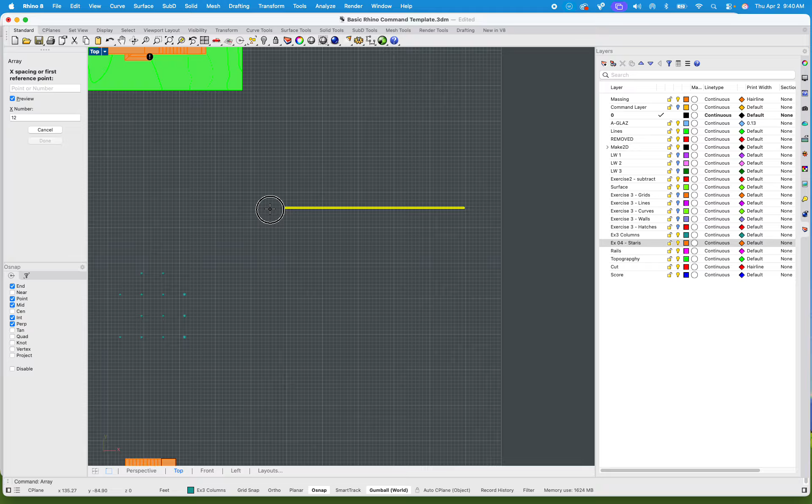So I take that piece - let's say I have, I don't know, 20 of them. Well, maybe not, I have less than 16, so let's go with 12. I could array it - let me spell array correctly. There we go. In my case, I want 12 in the X direction, enter. I want 1 in the Y direction and 1 in the Z direction. So I'll take that and make a couple - oop, went the wrong way. Let's try that again - 1 in the X direction, 12 in the Y direction, and we could do that. Oop, try that again.

No! Array can be particularly tricky. You gotta hit enter to keep it. But potentially I could make this 2D.

And print that out on a regular piece of paper. I can even have that ready to go too. So a regular 8.5 by 11, I do have to do that calculation again. Let's see, 8.5 times 8. Don't feel like doing hardcore math in my head today. 8.5 times 8, exactly 68 feet. So we'll go with 68 feet. And 11 should be 88 feet, because I could do that one.

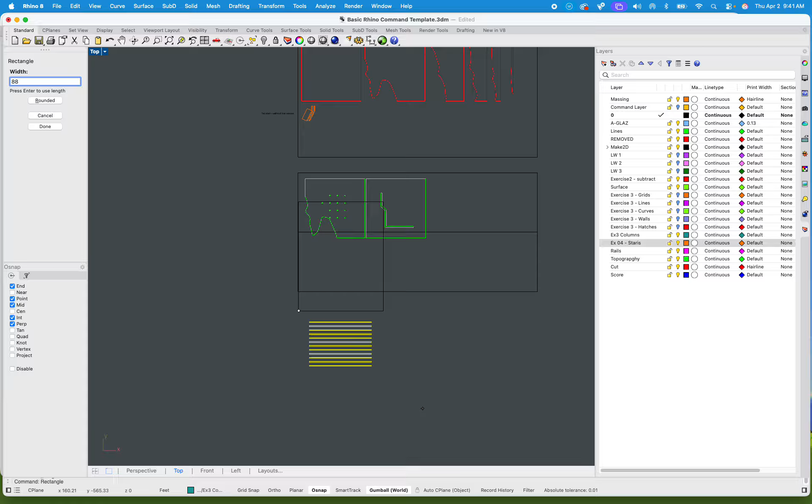And voila, we have a regular sized piece of paper that I can print out. To be fair, I don't even really have to take this into Illustrator. We could print it, so Command P. I'd make sure that my window is now set to something else, right? Not that 24x36, but I'd make sure it was the right paper size, and then just print that out.

You could even save it as a PDF from here. Arguably, I don't care about the color or the line weight, because I'm just going to use it as a template to potentially cut my dowels. So again, time saver here, right? Now I can get all my dowels and all the different sizes that I have.

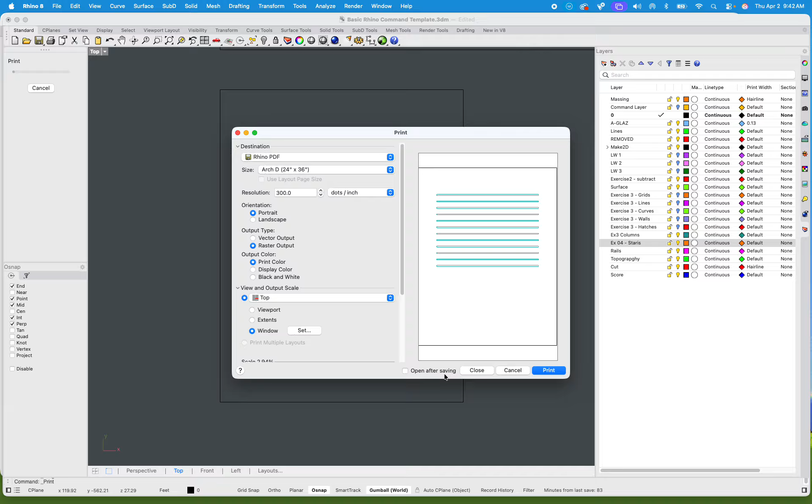We used to do, even just in regular studio before a laser cutter, stuff like the grids, or the very specific grids that we have, and we'd lay out and actually glue our dowels onto the piece of paper, and line it up with the piece of paper, and when it was done gluing, you had the whole shape.

Does that make sense? I can't express this enough. I know I'm kind of getting giddy and excited about it, because often I would have professors go, how did you do this? How did you make this so well? And it was because I would often make these other jigs, or other components. For instance, I could also laser cut this out of a board and line them up inside and really make them perfect. Now it looks like it was handmade, and yet it has the perfection of a computer.

Arguably, some people would say, like myself, that even classical architecture is like this. Have you ever noticed in classical architecture they never messed up once? What were they using? Oh, primitive tools, just a chisel, yeah, didn't mess up once with a chisel, bro? Have you ever chiseled anything?

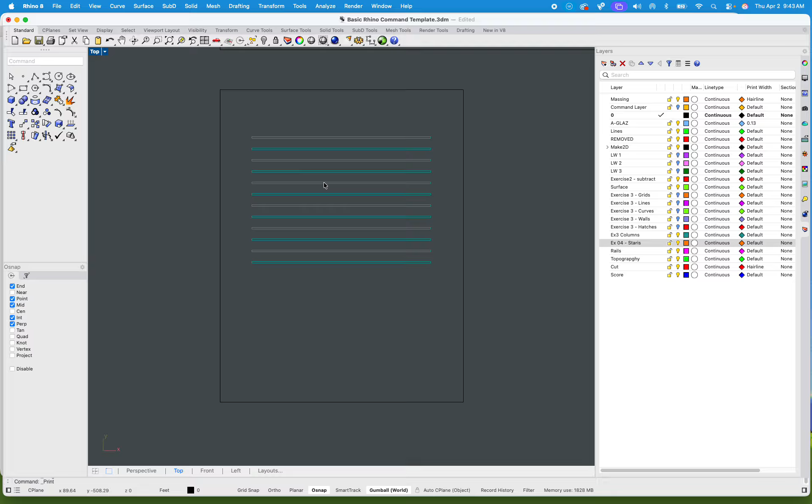Anyway, I digress. But arguably, I hope that's making some sense. If I cut this out of a board and then line them up, that makes it way easier, and it makes me look like a powerhouse. And I don't have to work as hard in measuring and getting that sense of accuracy.

But again, labels go a long way, so I'd copy that one. I'd want to maybe remind myself, let's face it, sometimes we're working off of 36 hours of no rest, and we're like, man, what was I doing again? So saying something like 'laser cut jig' could be enough to remind us, or remind somebody else, hey, laser cut that out and use it as a piece.

What else? A lot of stuff to run into. But again, really just kind of the tips and tricks. Now, I'm not necessarily going to do this the entire video, but you really would want to break it down piece by piece and start to eliminate as you go. We just got that one out of the way.

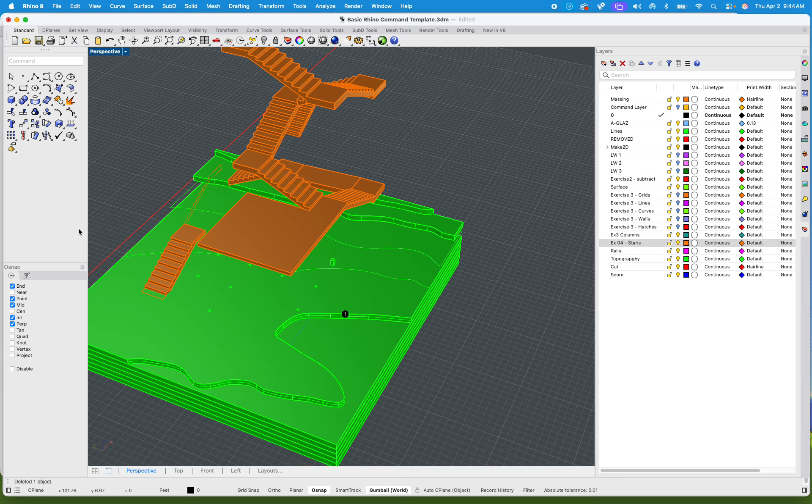I guess I forgot this one, so maybe we need 11 pieces and just glue those together. It's up to you, is what I will say. Because after all, this is where it doesn't count so badly against you, right? It's not a studio course. And arguably, if the model doesn't turn out well, you don't have to put it in your portfolio.

You've got a digital model that we're gonna start to render in Exercise 6 and start to do really cool things and make it look very realistic. I mentioned last time that we're also getting Lumion, so I hope to use that for Exercise 6.

Since I'm not going to be teaching you Revit, I do want to teach you another game secret, which is Lumion Pro. Arguably majorly used in the professional world, but arguably also the Instagram of architecture, right? It's literally filters upon filters. You can make grass look like real grass, and materials look like real materials on a whim, arguably even easier than Rhino. We can take our digital model and put it right into Lumion, click on certain materials, and bam. I'm not kidding when I say Instagram.

I'll leave it here for today, but if there's any major questions, let's get them on this video. Anybody want me to unroll something specific?

I was just wondering, the way you said there's like 11 stairs, even though there's different heights and whatnot, would you still print the same one stair?

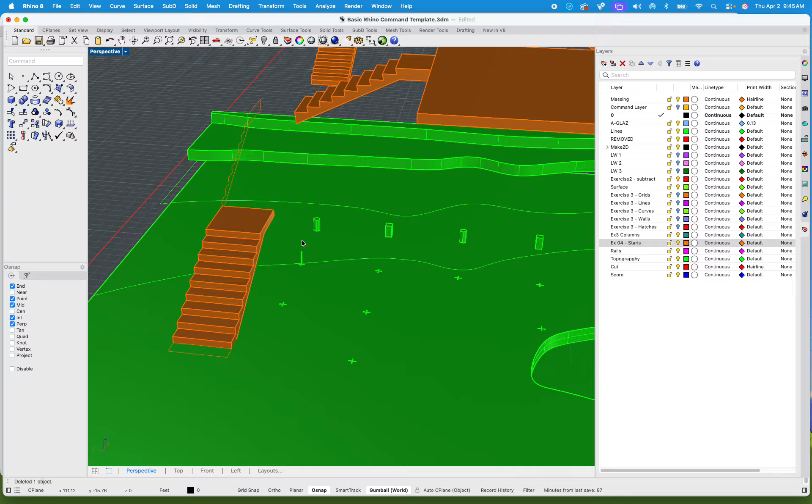Don't get me wrong, you'd have to make those pieces and then glue them together perfectly, right? So Wilson's question is, even though you made each of those stairs, is that going to work? Well here will be the tricky part, gluing that right back together. I mean, don't get me wrong, I could kind of do this as one piece, right?

Like this outside stringer, this face, to this face, to this face. You could unroll that entire thing and really put it all together as one piece, but arguably our laser cutter is only so big. So you might want to test some things that you unroll.

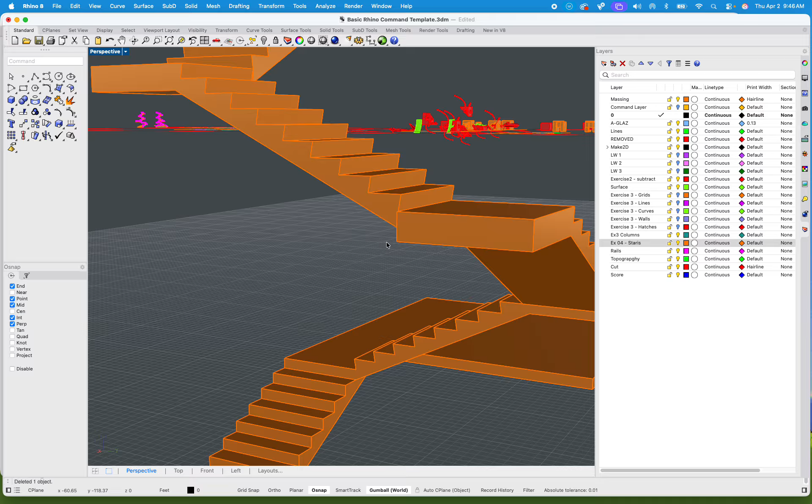As I was mentioning, let's take it, let's unroll it actually, just to prove a point. Unroll. Now this is very dangerous, but if you hit explode, check out what happens. It really breaks it down into every piece. Which, yes, this is what I meant by that won't fit on a laser cutter.

However, potentially it could fit on a piece of paper, and I could actually use other material or place it on top to cut that out effectively myself. However, some of these, it's like, dude, just laser cut that. Dude, oh, there's that platform I needed. You see what I mean? So don't get me wrong, there's nothing wrong with trying some things out.

After all, I can hit undo, it's not the end of the world. But that may actually be easier to make 2D and take those pieces. You may actually just need to count how many pieces you need. And that's a great way to do it because it exploded every piece that I needed. Let's redo that real quick. Shoot, you can even redo stuff, which is amazing. Sorry, undo, delete, redo, unroll surface.

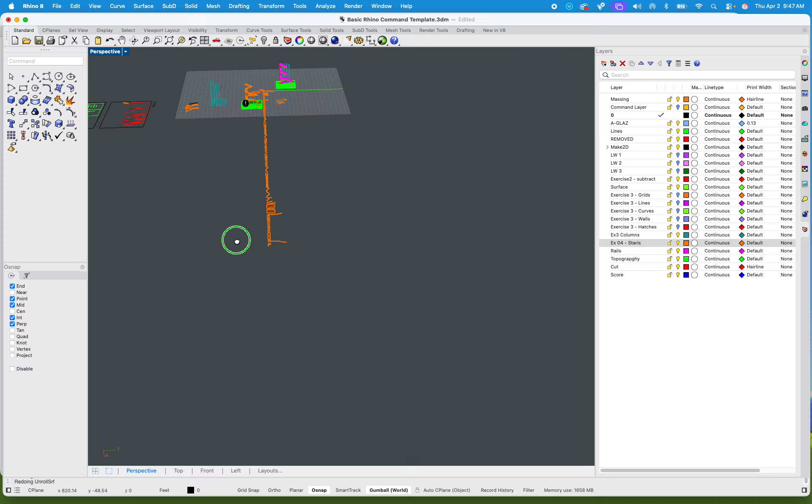But potentially I might need some of those pieces, and obviously some of them are repeating. If I wanted to verify that they actually are the same piece, I could. So I could actually move this one and go, is that really the right piece? Is that really the same? It is. So that is kind of nice.

But I could also verify, oh crap, I thought I needed 11, but I forgot I need both sides, I need 22 of them. Those kinds of things. So this is what I meant by it does take a little bit more math, it does take just a little bit more critical thought. However, at the end of the day, when you're making this model and you go, oh crap, I've only got 21, I needed 22, just go cut another one. Not the end of the world.

However, in studio, this starts to get really complex, right? For instance, Boguslav's D2, they're going to be working on a very complex model that's not made of regular pieces. And very often, some of those pieces are better to make by hand, some are better to make on the laser cutter, some are better to print out for what Rhino does best, and some of them you kind of have to fake it. It's just kind of the name of the game.

And often in architecture, especially the digital realm, we make things that are impossible. They overlap, they don't Boolean difference, but they look good, at least from a rendered perspective. So don't get me wrong, it is a little bit like this, but to answer your question, yes, of course. Good question. Anybody else?